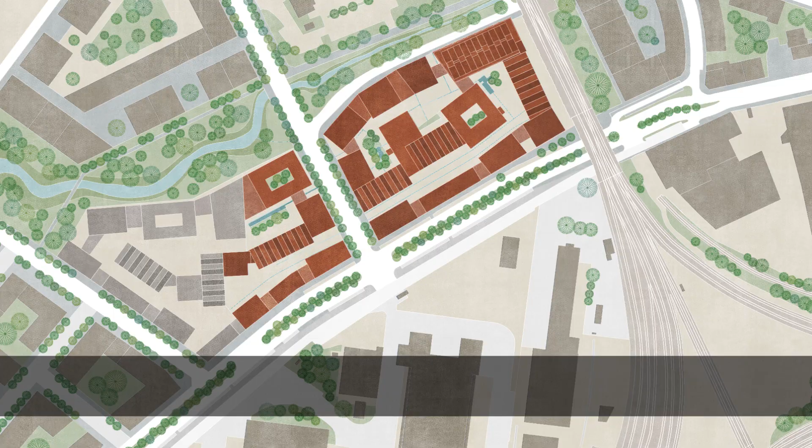The project is a specific response to a very special place on the fringe of the city, a site formed by many transformations at big and small scale, from infrastructure changes to small-scale development. The project we describe as the assembled city.

It is the coming together of buildings and spaces that have a sort of mutual character to the urban character of the city.